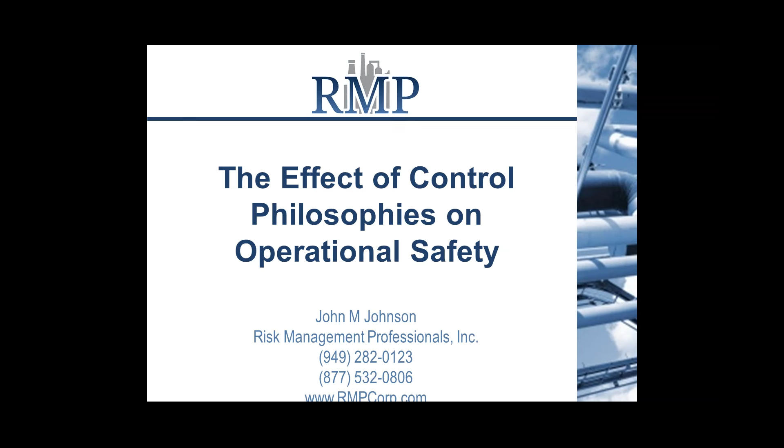Typically, control philosophy is developed during the design phase of a project. Over time, though, original documentation tends to get lost, or more often there are physical changes to a process that are simply not captured anywhere. I've been to a lot of facilities, and over time you'll notice that the piping and instrumentation diagrams have changed, and control elements have been removed from the field.

So the baseline assumption for this webinar is that even though at one time you had baseline philosophies, they've probably changed. What I really want to look at is giving instruction and feedback on how to develop these philosophies, not necessarily from scratch, but using the documentation, information, and resources you already have on hand.

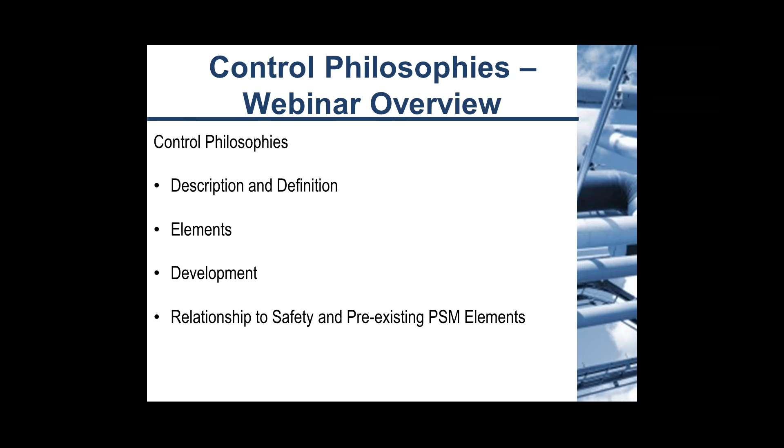That being said, we're going to start with a description and a definition of the philosophies. We'll look at the elements, and some tips for developing these philosophies. Then at the end, I want to go through the relationship of control philosophies with pre-existing PSM elements.

To start off with, the first thing we need to look at is your process control system. This is part of the process that is maintained by all the automated systems, and it consists of things like your automated system responsible for monitoring and transmitting process variables. This extends to your pressure, temperature, flows, anything you're using to analyze process parameters, transmitting them to a logic solver or some other method of controlling these parameters.

As I said earlier, this goes to control devices. This could be local devices—for instance, I have an image of a Fisher LevelTrol. This can also include your mechanical pressure valves, or remote logic solvers such as your PLC.

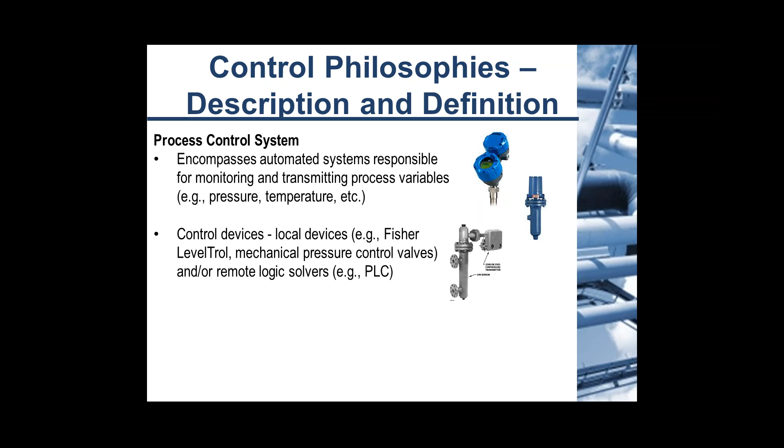Finally, your control system, the logic solver, is going to determine what needs to be carried out in order to maintain the process parameters you have input into the system. This is done via your final control elements—things like your automated control valves or any other element that brings your process back in line. So the control philosophy provides a description of how all these elements at your facility tie together, in one cohesive narrative.

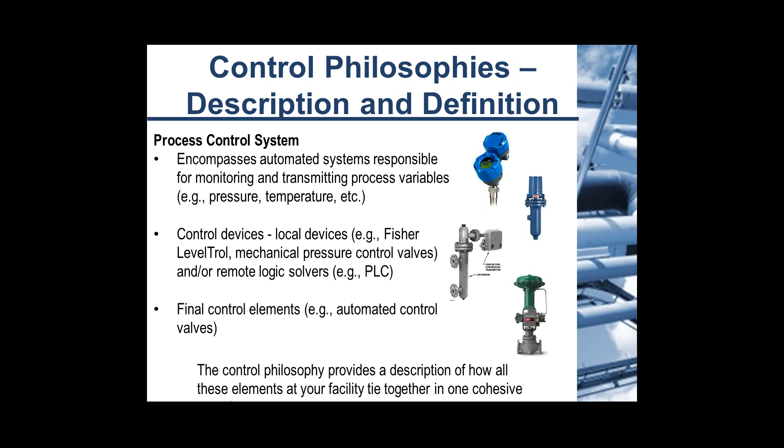Jumping in—description and definition. The control philosophy provides your operations, engineering, and instrumentation specialists with the details about what is occurring behind the scenes in a process.

What we want to have besides the revision sheet—the meat of these philosophies—is specifications for the major pieces of equipment used in the process, such as your vessels, tanks, pumps, and compressors. This usually is a description of first what's coming into the flow, what separation is happening in the field or in the plant, where it's going, and then as we delve down, we get a little more specific.

We put tableized reference material so we can look at the design temperature and pressure, the sizing of the vessels, and their tag names. A lot of this information is actually already available in the header of your piping and instrumentation diagrams.

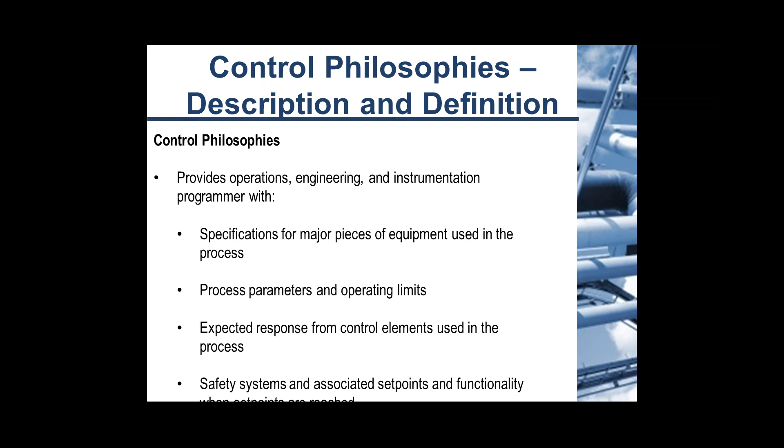As we go on through the process, we start going down and looking at it piece of equipment by piece of equipment. We'll talk about the inlet into a particular vessel, the outlet from there, and all the control elements that maintain the process. We'll look at process parameters and operating limits, develop the expected responses from these control elements, and capture the safety systems and associated set points, as well as the functionality if these set points are ever breached.

So by way of example, I put together a very simple diagram. This is a free water knockout drum that I'm naming V-101. You can see here I've got my inlet flow coming in, and my outlet flow from the weir. I purposely did not include the vapor flow out of the top or the water flow out of the bottom.

This is simply for an illustration as I give an overview of how I generally develop the wording and description in my control philosophies.

Here I am going to read directly from this slide. I start with an overview of this vessel. The free water knockout vessel, V-101, receives produced fluid from the upstream production header via inlet valve at the north end of the vessel. Separation into free water and emulsion layers occurs as the produced fluid moves through the vessel. The oil is decanted by weir at the south end of the vessel. Gas is stripped from the top of the vessel, and water is removed from the bottom of the vessel.

For the sake of this presentation, I noted that those items are not pictured here. Obviously, if you're developing a full control philosophy, those items would be shown on the schematic.

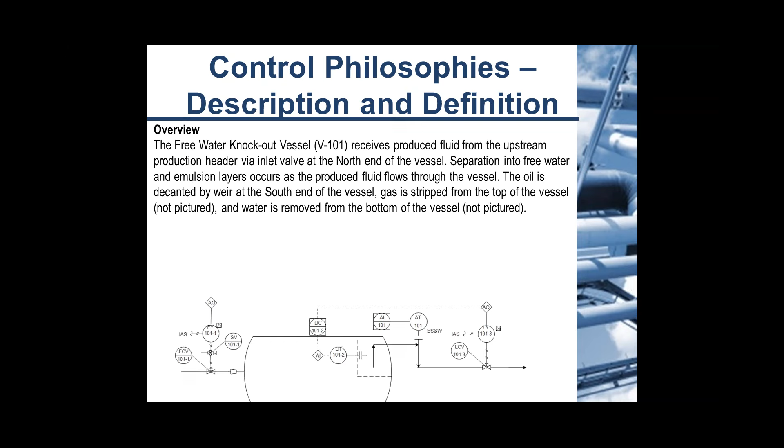So now we delve a little bit deeper. Now we really want to look at the control. What is occurring here? So once again, just looking at the inlet flow, it is controlled by a fail-open inlet flow control valve called FCV101-1.

Flow rate is set manually by operator via the HMI. In the event of a power failure, the flow of instrument air to FCV101-1 would be shut off by the associated solenoid valve, SV101-1, so that FCV101-1 would fail open.

It's kind of wordy, but if you look at it, you can see I've pointed out the basic functionality of the device. I've talked about the interaction with utilities, and I've noted the fail state.

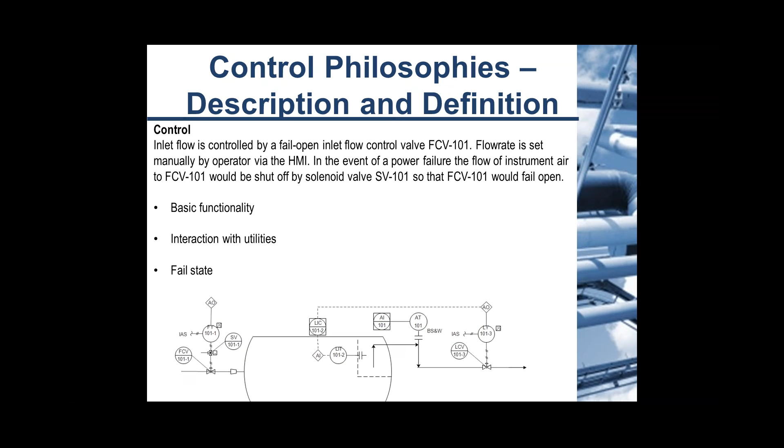So moving on to some of the more instruments that we'll see in this particular unit. Now we want to talk about the level. Once again, I'm not going into the interface level here. I'm really looking at what's going on in the weir.

This is a statement that I would put into the philosophy. The level in the weir is monitored by level indicating transmitter LIT101-2. The level is maintained via PID loop configured to open level control valve LCV101-3 in order to maintain the level at normal operating levels as set by the operator.

LIT101-2 has an associated high and low level alarm. These are set at 3 feet 6 inches and 6 inches respectively. These will both activate an alarm at the HMI to alert operations to level deviations in the vessel.

Once again, there are safety features associated with this particular control device. I have stated that in the wording and in the text of the control philosophy. So that is wordy. It's a complete description, a narrative, once again focused on these two particular inlet and outlet flows.

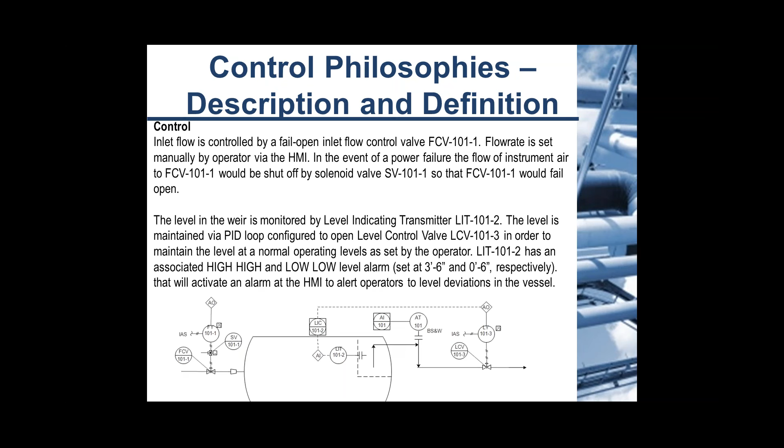But of course, we also provide reference tables that let someone quickly access this information. So once again, here's a quick look at an instrumentation table. We want to note a description of it. So we're basically saying here we have our control for LCV101-3 and our control for FCV101-1.

We note that the instrument providing this control is the level indicating transmitter LIT101-2, and we note the set point. We also note for the other instrument, this is actually set at the HMI, and it will vary based on what operations have set for that period.

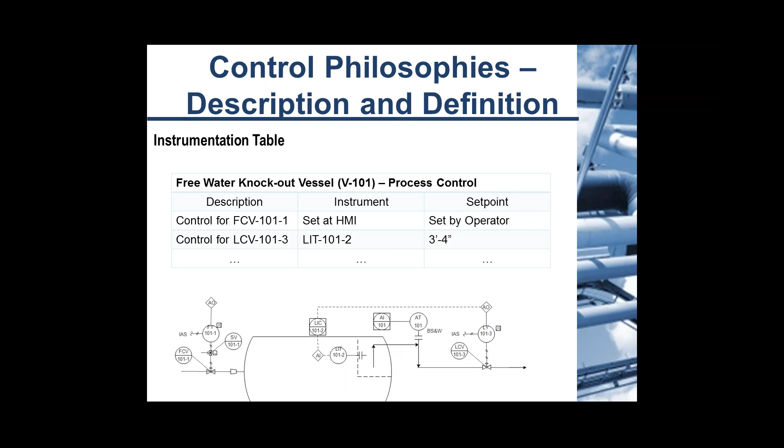Next, we look a little more at our safety systems. This is a little more extensive table, but it still captures the same basic information. We want to look at our device, our transmitter.

This is what's going to send the signal. We want to give our alarm tag numbers. We have our level alarm high, designated as LAHH, and a level alarm low, designated as LALL. We include our set points so someone can easily reference where the alarm is going to function. We put the action, which here is simply an alarm.

Then we give a description of what happens when that alarm triggers. V-101 emulsion level alarm high alerts at the HMI when the level exceeds the set point. It's simple, but someone can reference it quickly.

As I said earlier, I didn't include the other outlets from the vessel, but I did want to include, for instance, if you did have the gas outlet, you'd most likely have a pressure indicating transmitter with associated pressure alarms. So I included these.

I also didn't want all my actions to just be alarms, so I threw in an alarm and valve closure. Those actions can vary from saying things like alarm/valve closure to alarm and trip. Once again, use your description, as I did here: V-101 high pressure alarm, alarms at the HMI when level exceeds a set point, and shuts off supply to the vessel by closing the upstream header control valve. If it had been a trip, you'd want to state everything that happens when this safety element activates.

What compressor it trips, what valves are shut down. This is a quick way to look and figure out exactly how your safety systems are operating in the field.

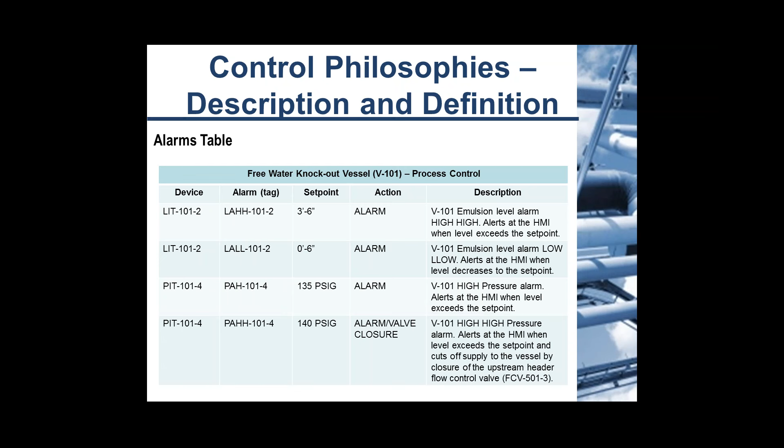So, by way of reiteration, the elements of a control philosophy: first you have your table of contents and revision sheet. You also have your description of the overall process. This is a very important key component. You want somebody to be able to read this, similar to looking at a process flow diagram but in words, and understand exactly what's going on in your process.

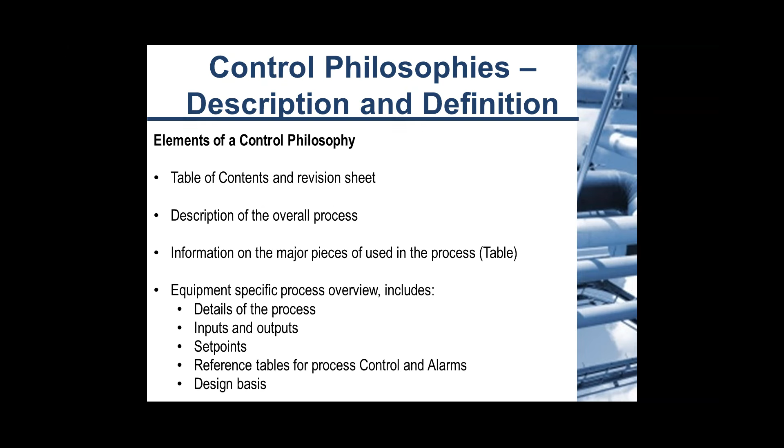You also want information on the major pieces of equipment used in the process, and this is generally tabled - a little easier to read, a little easier to take in the information required. Then you want to delve deeper into the details. You want an equipment-specific process overview, including the details of the process, your inputs and outputs, your set points. You'll keep reference tables for process control and alarms, and you also want your design basis in there.

So that was a very quick overview of what is contained in a control philosophy. What I want to do now is give some tips for development, some of the things I need to do when I go out in the field, and I try to develop these for a facility.

I was at a PHA a couple weeks ago, talking to their control specialist about control philosophies and what he does to develop them. He pretty much said he tries not to. He said that usually if you want to develop a good control philosophy, you need to live in the field for about 6 months to a year. Through my experience, he is close to right.

I do spend quite a bit of time in the field, but these are also some of the documents and information gathering tools that help reduce some of the time spent putting together all the information you need. Starting off with piping and instrumentation diagrams - I already mentioned this, that information almost directly correlates to your process overview table. It's where you're going to get most of your information from.

Generally that information doesn't change too often over the life of the facility, and there's usually documentation you can follow to figure out where changes have occurred. Process flow diagrams, as I mentioned earlier for the process overview, it's almost simply a wording of what you see in a process flow diagram, a little easier for operators or anyone in the field to read and understand what's going on.

U1A forms for pressure vessels, obviously that's going to provide information on your vessels out in the field, and it's going to be included in your process overview. Any original design documentation - obviously this may have changed extensively over 10, 15, 20 years of operation.

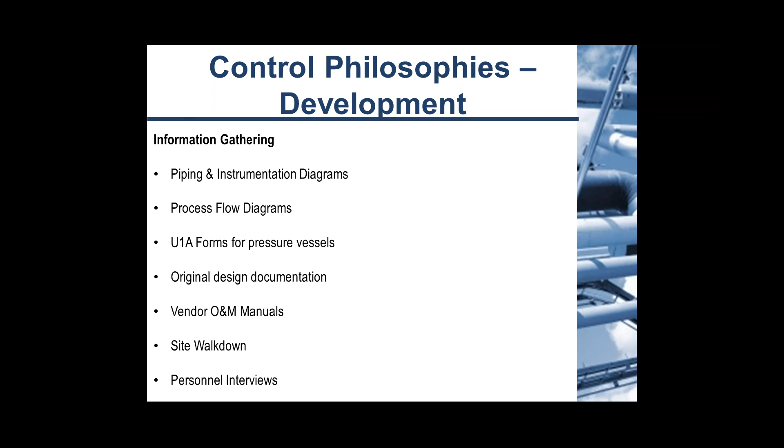So having discussed the basics of the control philosophy, also some tips for development, what I really want to cross over now is the thrust of this webinar: the effects of these control philosophies on general process safety.

And to do that, I wanted to show the correlation and overlap between control philosophies and PSM elements you might already have at your facility or might be actively developing. From a safety perspective, there are so many points that intersect. I have a graphic here. So you have a control philosophy, and you can see it touches your PSI, your process hazards analysis, your management of change program, standard operating procedures, mechanical integrity, and your training program.

Moving into these elements, I want to start off with operating procedures. The reason I want to start here is, in my mind, the control philosophies exist side by side with the operating procedures. This comes from experience of reading many different philosophies from facilities that have evolved over the years. It used to be that you'd have one single document that would say, here's the automation going on in the process, here's what the operator does. It did provide a good scope of information, but over time we've realized operating procedures work a little better in a step-by-step manner.

So that someone can take it out in the field and go, hey, I turn this valve, I press this button, this is how I get the process working. I don't necessarily need the details of the automation going on in the background. However, I've never heard anyone say that too much knowledge is going to be a detriment. So, as I said earlier, we try to have them be side by side. Put them together, and you should get one very good scope, one good idea of how the entire field is working. Operating procedures are good for in the field, walking around. Control philosophies are a little better for just reading and understanding the process.

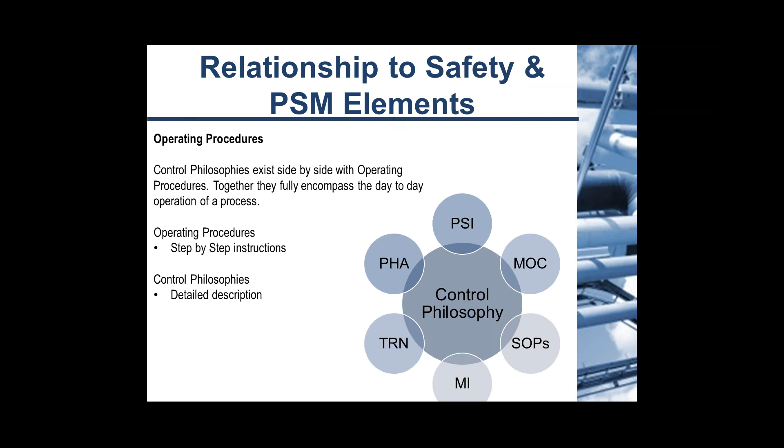Based on that, we should go and look at training. As I said earlier, control philosophies are an item that should be looked at and absorbed prior to even going out in the field. A control philosophy is to provide personnel with working knowledge of how the automation controls the process, maintains the process operating within its design intent. It actually makes a very good addition to your training toolbox. You can give them operating procedures, and even though they might not need to make direct contact with the automation, they most definitely should know what is going on with it, especially in the case of alarms.

During PHAs, we bring this up a lot. If an operator hears an alarm, do they know what the alarm is? Do they know how to respond? If they don't know what the alarm is, the time taken to discover what that alarm means might actually make the difference between a very large disaster and something that's easily mitigated and solved before it goes to fruition.

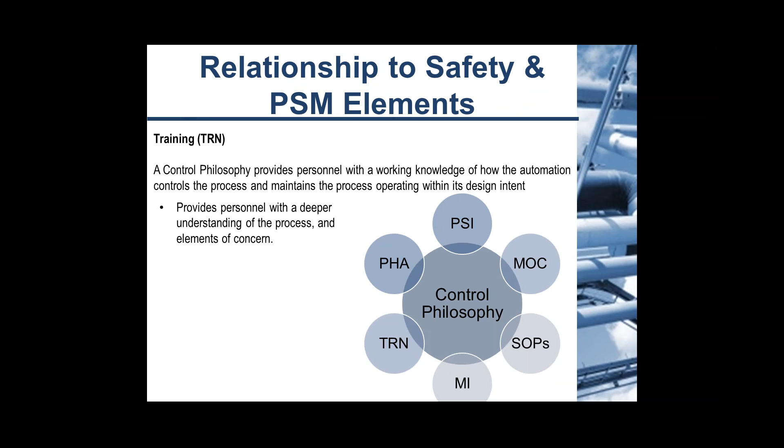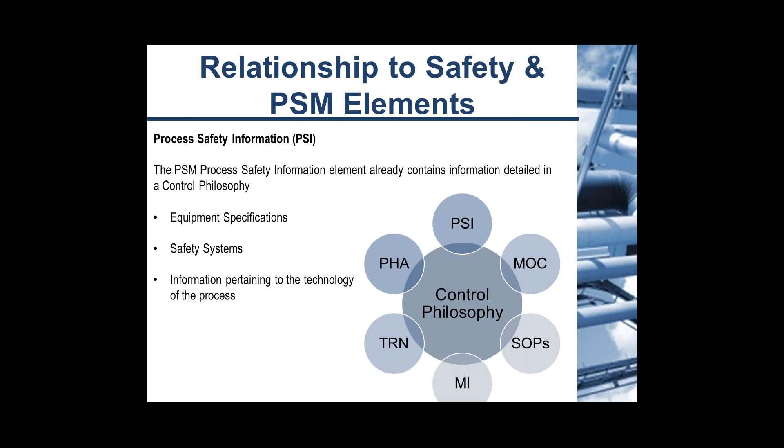Process hazard analysis - this is where I really first started coming into contact with control philosophies. Over time, I've managed to build quite an extensive library that I look through, looking for elements I like, things that make sense, ways to develop these that provide the most effective tool for a facility. Some facilities I go to swear by them - they say if it's in this philosophy, it is in the field, it is the Bible. I've actually heard that quoted in certain studies. Unfortunately, other facilities will say, well, it's in the philosophy, but we really need to send someone out there in the field to make sure this is true. I actually think having no documentation is slightly better than having incorrect documentation.

Because once again, if you have no documentation, someone's going to go verify it. However, if you have incorrect documentation, you're going to make decisions based on that incorrect documentation.

Some other helpful items that the control philosophy helps with during the PHA: you get details in your control loops, you get to look at your safety systems, and you get a good overview of your basic process control system.

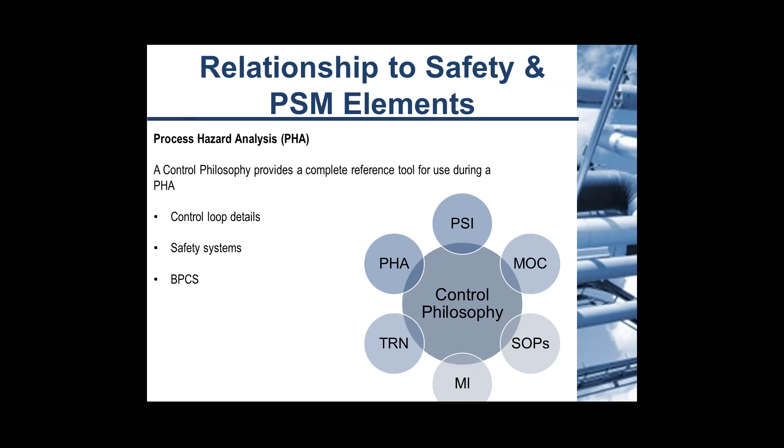I brought up earlier the wording, and I showed you in that example. If you look at that wording, it's actually very similar to the way I would word a safeguard in a PHA. I look at the device, what does it do, what's its tag number, where is it located, what's its response, what are its set points. All those are elements that you'll also see in a control philosophy, so you can definitely see the overlap between a PHA and these philosophies.

Management of change. Some facilities are great with it, some are not. Usually you have a checklist, and it says things like you need to update the P&IDs, you need to update the operating procedures.

But what the control philosophy does is let you know how a change affects other units in the field. So you can sometimes be focused on your piece of equipment - hey, I want to remove this pressure control valve from this tank - but what you don't know is what that's going to do to the downstream compressor, or the upstream equipment. This gives you a very good overview so you can sit in this pre-design phase and help make decisions that will make your process run the most effectively and the most safely.

Basically, the control philosophy is kind of a one-stop shop for all your process information.

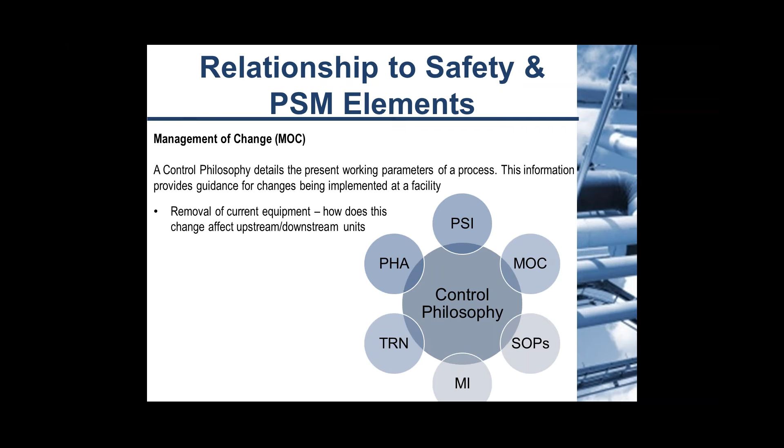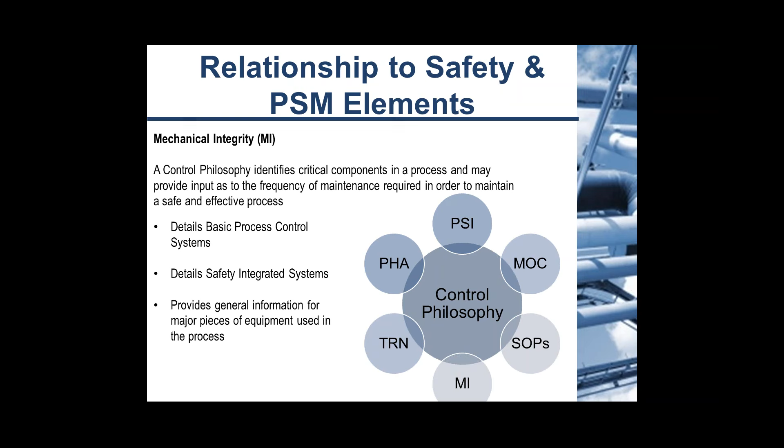The mechanical integrity program, I think, is intuitive. Mechanical integrity deals a bit more with frequencies of maintenance and looking at your equipment, but you really want to look at how each piece of equipment responds in the entire process. Looking at a single compressor sitting in the field, you can think about the maintenance on that, but you really want to know what this compressor has to do with your upstream and downstream equipment, and what pieces of control elements are controlling the flows into it. This can actually color your maintenance activities and give you an idea of how important one piece of particular equipment is in your process.

So in conclusion, we've looked at a basic definition of a process control system and how you would develop a control philosophy to describe this system. Obviously, control philosophies are much more developed, much larger documents. I had given you a single vessel with only one inflow and one outflow, but this vessel alone has two more flows, different phases, different control elements, temperature alarms, pressure alarms. So as you can see, these control philosophies can be very developed, very detailed.

And you want that. You want to be able to read this almost like a book and tell you what's going on in your process out in the facility, out in the field, or wherever it might be. So the control philosophy provides a description for all the automation elements responsible for maintaining operation of the process, done in one cohesive narrative.

The control philosophies intersect with multiple PSM elements. The majority of the information is already available at the facility - you can pull from your previous documentation and probably get a lot of what you need. What you can't get is where field walkdowns and personal interviews come in, especially building that relationship with your instrument control specialist, getting into the programming, and really looking at what is happening with each control element.

The control philosophy is a living document. Like a lot of the PSM elements, it needs to change as the process changes. I stated this at the very beginning - you probably have original control philosophies, but somewhere it fell by the wayside, and now they don't really mirror what's going on in your field. Keep updating it, and you'll have a very strong document, and over time this is going to alleviate a lot of the other documentation you need to prepare. You'll be able to access this information easily.

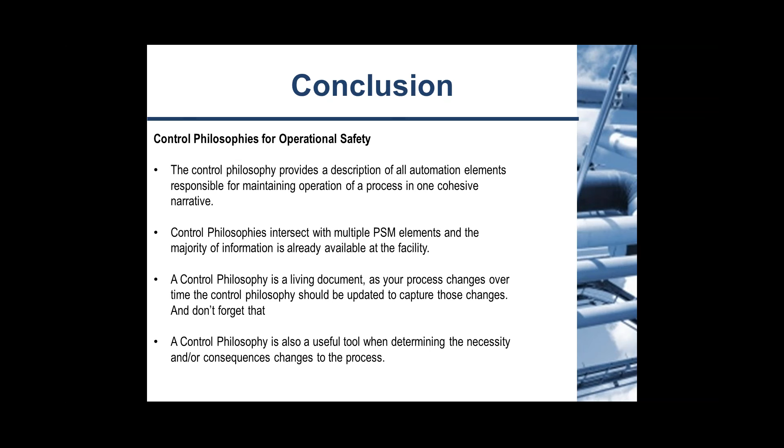The first question is, we are in the middle of developing new PSI procedures. I'm having a control narrative as part of the safety systems documentation. It seems these used to be called the BPCS narratives. Is the control philosophy a new name for the control narrative?

Yes, in fact, I meant to say that at the very beginning. I use control narrative and control philosophy interchangeably. I actually like saying narrative a little bit better, but they are the exact same thing. The difference is if you look up the control plans, which were kind of tabled versions, developed about 10 or so years ago, those are useful, but they do not provide the information of a control philosophy or a control narrative.

Next question. Is there a specific regulatory requirement for a control philosophy? And would a cause and effect diagram satisfy the need for a control philosophy package? So there's not a regulatory reference. I have looked, and everyone develops them based on their needs, but there is not a particular regulatory reference or a standard that I can cite that drives these documents.

In regards to the C&E, it contains the essential information that you'll see in the control narrative. Once again, I like the narrative a little bit better because it's a way to not just get that information, not just get the tables, but to actually read and get an idea what's going on in the process. So C&E is useful. There's not a regulator who's going to come to your facility and say you also need the narrative. But in my opinion, I would also say develop a good control narrative alongside that C&E, and you have a good feel for what's going on in your process.